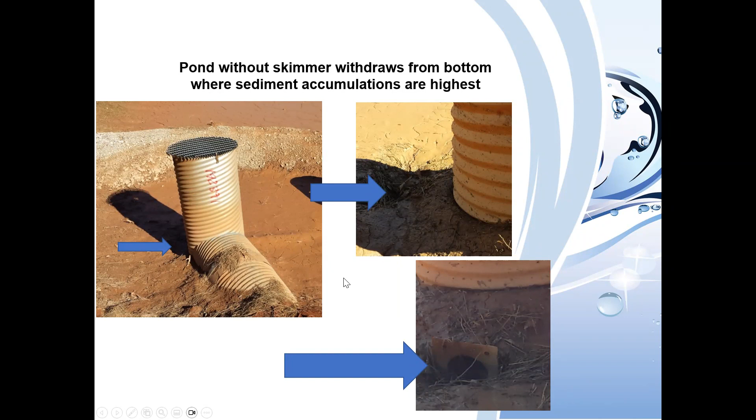So skimmers have been around for quite a while now. Some states have been enforcing them for maybe 15 to 20 years. Others are just now coming on board. But the main thing with the skimmers, it floats on or near the surface of the basin and drains the basin from the top down. So it meets the surface dewatering component of your construction general permit. And they've actually shown to be very effective. It makes sense. You release the cleaner water at the top of the water column, allow more time for the mud to settle, and then slowly drain the basin down to the bottom.

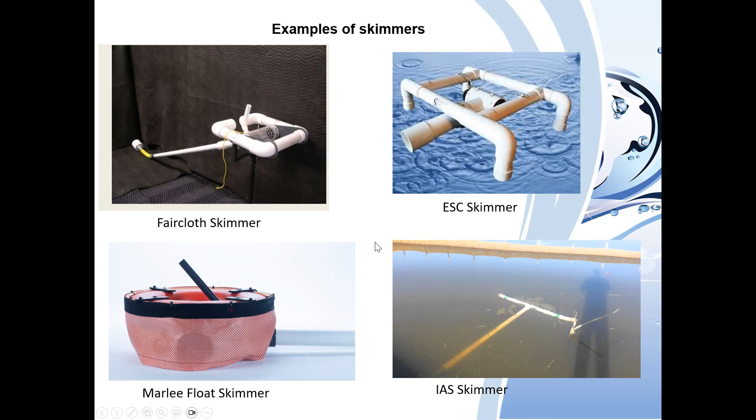So there are a number of skimmers on the market. The Faircloth skimmer was one of the first commercial versions. Erosion Supply or ESC skimmer is very similar to the Faircloth. You've got the Marlee Float, which obviously looks a little bit different than most of the others, and then the IAS skimmer. And there are some skimmers that can be made by the contractors.

So there are three basic fundamentals of sediment basin design. The first one is basin volume. What I've seen over time, and we sell skimmers in a number of different states, 1,800 to 3,600 cubic feet per acre seems to be the norm. Indiana requires 5,600 cubic feet per acre. So for 5 acres, that'd be a 28,000 cubic foot volume. Texas prefers that you calculate the volume based on a 2-year, 24-hour storm, or allows 3,600 cubic feet per acre.

And actually, if you get into the design, it's the lesser of the two. So if you do have a 2-year, 24-hour storm that produces less than 3,600 cubic feet per acre, you could use that. In Indiana, similar, it actually allows you to calculate the volume based on the 1-year, 24-hour storm. And so in a lot of cases, that volume is going to be less than that 5,600 cubic feet per acre. So if you're trying to save area on your site, which we all fight with trying to have room for these sediment basins and detention ponds, it may be worth calculating in those areas.

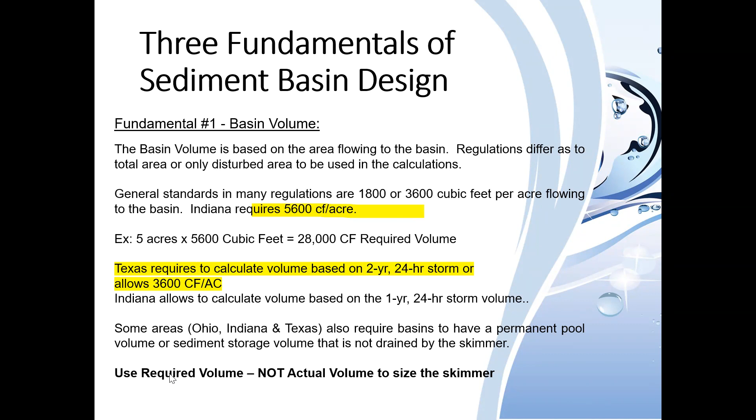But most other states just have a standard of 1,800 or 3,600 cubic feet. Some areas, Ohio, Indiana, and Texas among them, also require basins to have a permanent pool or sediment storage volume that is not drained by the skimmer, and you do not include this volume when you size the skimmer.

So the second fundamental is dewatering time. So basins are going to work by allowing time for sediment to settle to the bottom. Again, surface dewatering and giving more time to get the sediment to settle out. The time required is going to vary based on the soil type. Obviously, sands are going to settle really quick. So if you're in a very sandy area, that's fine to maybe let it drain a little faster. However, silts and clays take much longer, if they settle at all. It's different getting the mass out versus the color out.

So what we see across the country is 2 to 5 days is probably the most common standard we see. Indiana is 48 to 72 hours, and Texas is a minimum of 36 hours. And actually, I forgot to change this. I actually found where there is a max of 72, so it's 36 to 72 hours in Texas. And use your engineering judgment to determine the need for extended times for soil types versus the frequency of rain events. We're based in South Carolina, and so it's not uncommon to get that thunderstorm every afternoon in the summer. So you might want to drain the basin a little faster so it doesn't overtop.

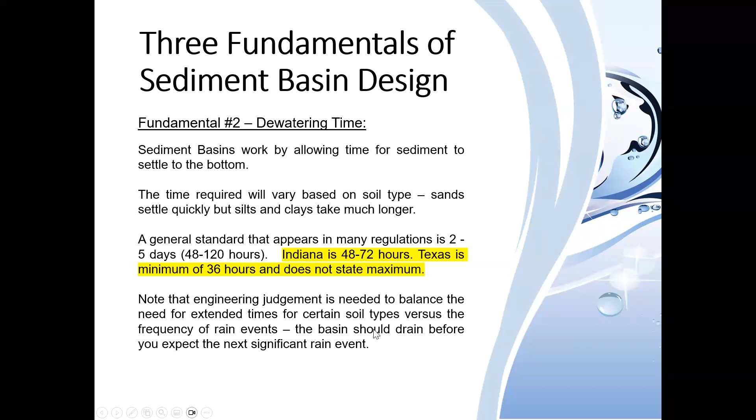So once you have the basin volume and you have the dewatering time, the third is going to be the flow rate. So the flow rate is going to be basically determined by the basin volume divided by the dewatering time. And you're going to use the minimum dewatering time for the maximum flow rate and vice versa. So for example, our 28,000 cubic feet for our 5-acre site in Indiana would be 14,000 cubic feet per day if you drain it in 2 days minimum time, or 0.16 CFS. Or if you did a 3-day, your flow rate would go down to 0.11. So one thing to point out, especially when you have that broader 2 to 5 day range, so 72-hour range, a lower flow rate will often result in a smaller and typically less expensive skimmer.

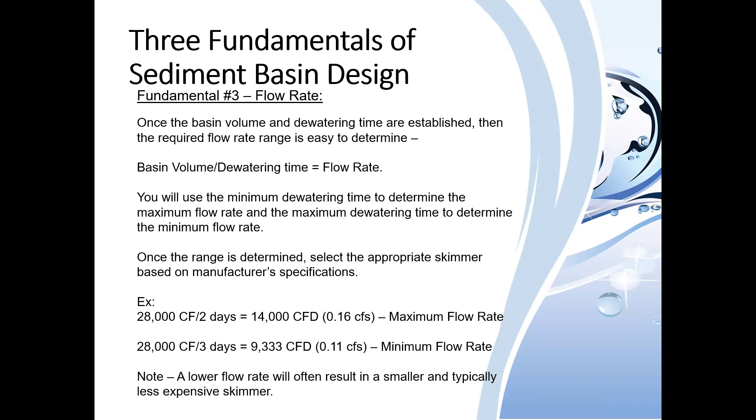So since we do have folks from Indiana and Texas, we're going to talk about the state standards there. So the standards in Indiana are fairly new. Actually, these are from IDEM, their state department, and they still have draft on them. So that's how new they are. So again, the dewatering zone for sediment basins is 5,600 cubic feet or the 1-year 24-hour storm. And you do have this sediment storage zone that is below the invert of your skimmer, and it's 1,000 cubic feet per disturbed acre. That's also in Texas for sediment basins, both of those.

And then the dewatering zone should drain no less than 48 and no longer than 72 hours. So a 24-hour range is actually pretty tight for these. We've seen a lot of places where you have a 72-hour range, but that's what IDEM has decided they want to go with right now.

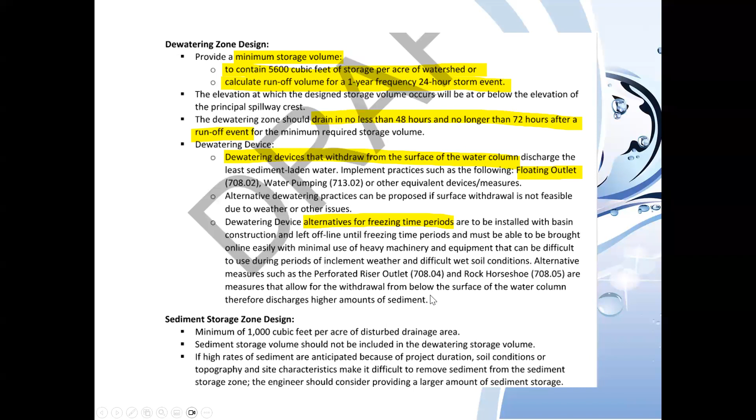They do require that you dewater from the surface, so you can use floating outlets, pumps, or other things. And one thing to point out is you do need to make alternatives for freezing time periods. If your construction site is going to be under construction in that probably November to February range, folks in Indiana know this better than myself, you need to probably have a way to drain that basin if the skimmer does freeze in the pond. And then finally, like we said, the minimum 1,000 cubic feet, and again, they point out should not be included in the dewatering storage volume.

Apologize, I'm getting over some allergies, so may cough a time or two, but try to keep that to a minimum.

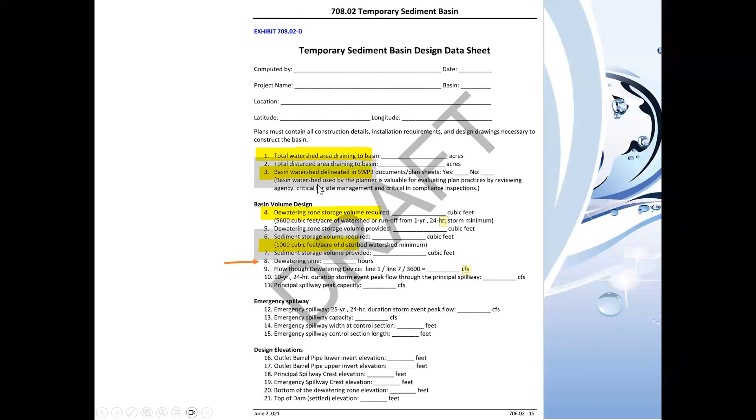So your temporary sediment basin design sheet, you're going to have this area here. You got your total area, total disturbed area. Those correlate with your dewatering zone and your sediment storage volumes. One thing here on dewatering time, we recommend establishing a range of time for dewatering. The reason for that is you're often going to get a contractor that says they have a different skimmer that they want to use, and can we use it? Well, maybe, maybe not. Depends on if it still meets the flow rate required. So if you establish that range, it gives them more likelihood that they can do that.

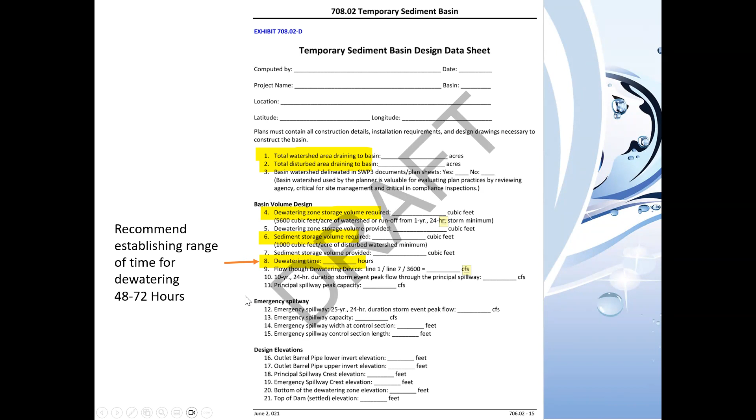I'm not going to go through this entire basin data sheet. I'm sure most of you are familiar with that. I just want to kind of focus on the things that are skimmer related for this webinar today.

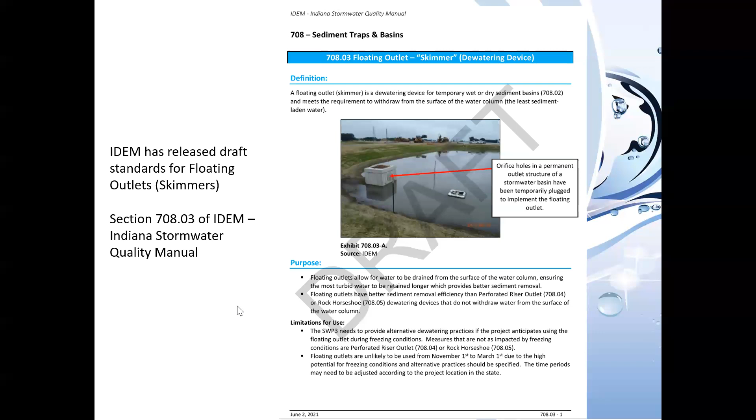We're going to jump over real quick to Texas sediment basin standards. So they're similar. Again, the storage provides storage for the 2-year 24-hour storm or the 3,600 cubic feet per acre. One thing to note is the Texas TCEQ construction general permit just went into effect last year, this time, March 5th of '23, and it has very specific requirements for sediment basins. We're just now really starting to see more skimmers in Texas, but these regulations have been in the construction general permit since 2013. I believe March of 2013 is when they first went into effect. And so it's taken 10 years or so to kind of get around to enforcing these things.

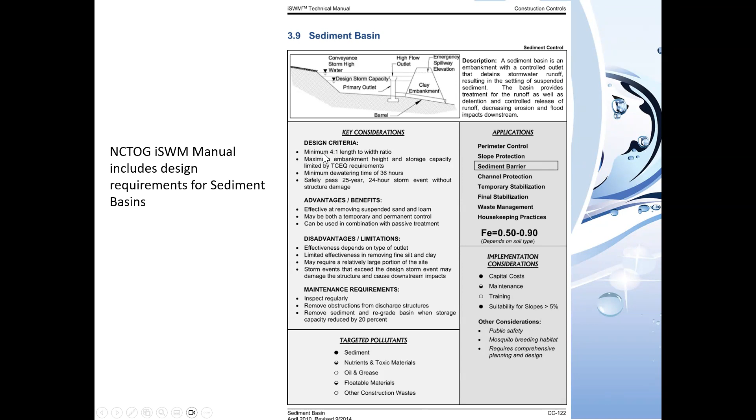And then they do have in the CGP that unless infeasible, you need to use outlet structures that withdraw water from the surface. So a lot of the details in certain cities and counties in Texas still show the riser structure in their standard detail, but they're starting to catch up with updating their standards to include skimmers. So north central Texas is where the stormwater manual comes from. This includes design requirements for sediment basins. Again, has kind of the same things in here we've gone over. One thing they do point out with skimmers is that for the flow rate needed to discharge the basin, you need to select a skimmer based on the flow rate, not the skimmer size. And we're going to talk about that in just a second.

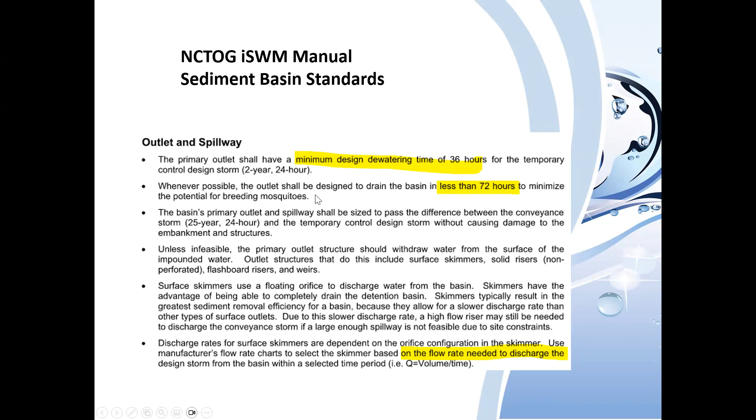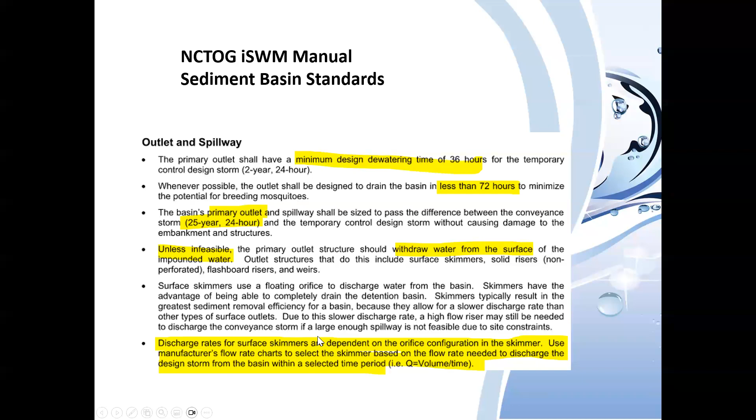Again, you've got a minimum dewatering time of 36 hours. And here we have, at least whenever possible, less than 72. They don't say a shall there. So if you end up going slightly over 72, looks like that's okay. Your primary outlet is going to be the 25-year 24-hour storm. And then again, withdraw water from the surface unless infeasible, and base the discharge rates on the skimmers itself. Most skimmers have third-party testing to confirm their flow rates, and we recommend you use that rather than the orifice equations.

Again, there is a design form for North Central Texas, has the general same information. Oops, sorry, jumped through that. And it does say the lesser of 3,600 cubic feet or 2-year 24-hour storm. So the text is a little bit different than that, but since they've got this design form in there, I'd say you're safe to go with that in most cases.

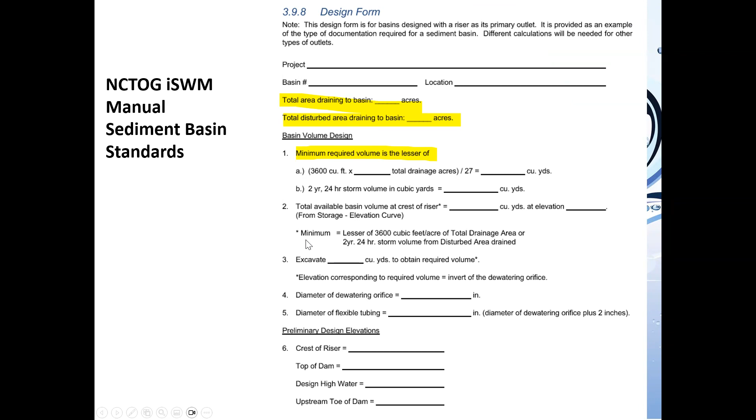Then I just quickly want to run through some state sediment basin standards, just to kind of give you a feel for how it does differ across the country. South Carolina, where we're based, again, the volume is 3,600 cubic feet for the total area. Texas is the 2-year 24-hour storm or 3,600 cubic feet, plus the 1,000 cubic feet for sediment storage.

Indiana is the largest volume required of 5,600 cubic feet plus that 1,000, and then Ohio is 1,800 cubic feet plus the 1,000. So you can see pretty big differences when you go to your pond requirements for the different states. Some states have requirements for surface area. Texas has a minimum length to width ratio they want to see. Indiana and Ohio just have a preferred or maximum depth.

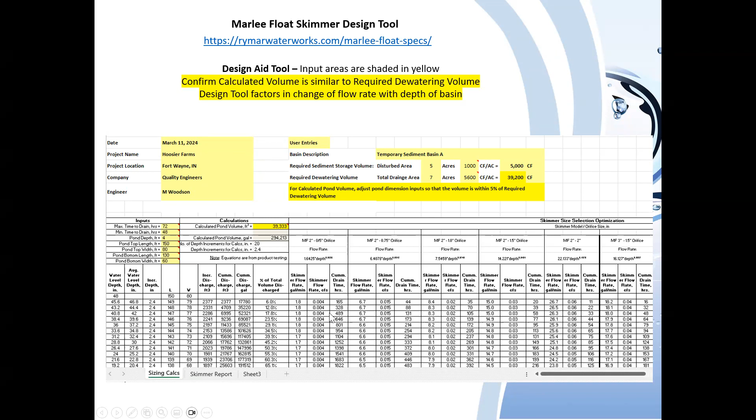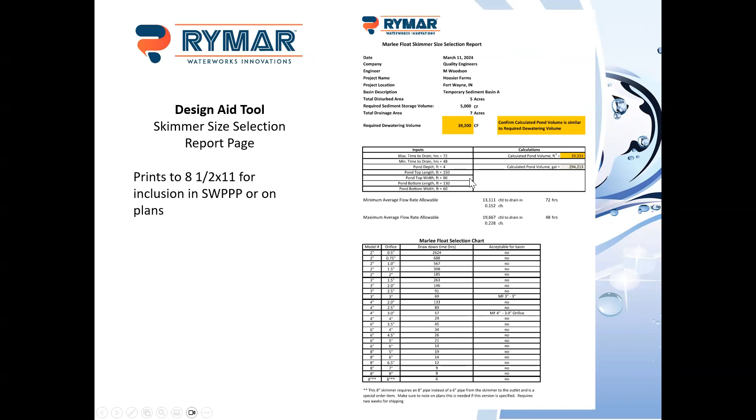It's going to calculate a pond volume for you. Don't spend all day trying to get this to exactly that same number. We typically recommend trying to get within about 5% of your required volume, because again, you're working on a range of time here. When you do that, our handy dandy tool is going to calculate the flow for each skimmer with each orifice configuration. And then down here at the bottom of the page, it's got a skimmer report page tab. Click on that, and it's going to take you to a nice, neat 8.5 by 11 for inclusion in your SWPPP or on your plans.

The top section is going to have that required pond volume check. So really quickly, your reviewers can see that, hey, we've met this. I know we had a lot of people from Ohio. Depending on your location in Ohio, this is a pet peeve of some reviewers there, if they size the skimmer on the total pond volume. Now, that total pond volume may be 100,000 cubic feet. Well, if that's the case, you drain that 39,000 way too fast. So that's why you want to base that. We tell you what your minimum flow rate is and your maximum flow rate is based on that pond volume.

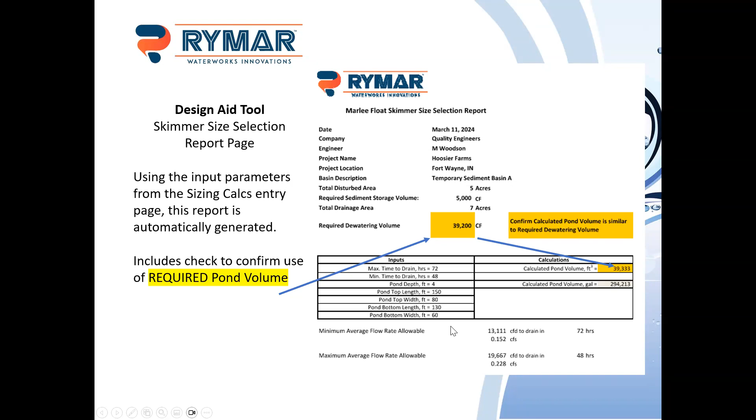And then because it is our tool, it'll give you the drawdown time for each of our skimmers with each orifice configuration and tell you which one here met your time frame that you established. So if you've got say a 2 to 5 day range, you may have 5 or 6 skimmers available here. And then as engineer, you can pick which one you want. Do you want to go with, in this case, the 4 inch that drains the pond a little faster, closer to that 48 hours? Or do you want to go with the 3 inch with a 3 inch orifice? That's getting close to that maximum time, but it's going to be a little less expensive for the contractor. Up to you as engineer, which one you prefer.

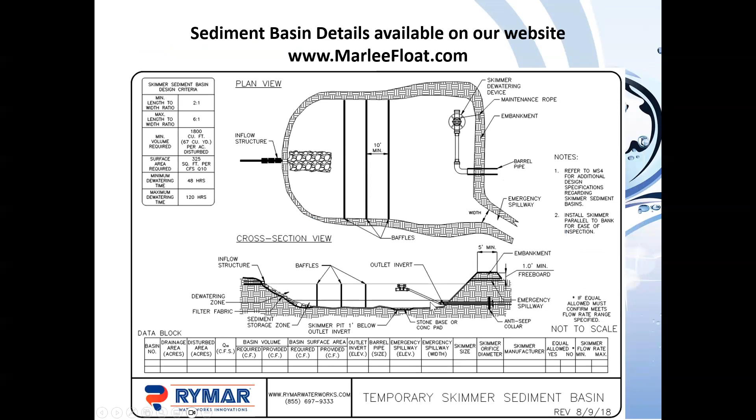We have some standard details on our website available as well. We have 4. This one is our standard temporary basin that doesn't have a riser structure, and it's a dry basin. This one is our more typical, going to be a post-construction basin, or at least it has a riser and the skimmer. It also has a permanent pool. So if you look at this, there's a chart here that'll tell you the minimum length to width ratio. Now you can edit this as needed. Like here, I've got 2 to 1, and in Texas, that's 4 to 1. Maximum length to width ratio, here I've got 6 to 1. Actually, in Texas, they prefer it up to 10 to 1. So you can change this as needed for your location.

Very important here, put in your minimum and maximum dewatering time. If you plug that in now and you get that approved during your review, it makes it much easier if you need to swap out skimmers or make a change. Again, you just want to make sure you meet your sediment storage so your provided is equal to or more than your required. Your dewatering volume, typically your provided is going to be greater than your required. And then standard features: your drainage area, disturbed area, your flow rate for whichever storm events are required for your area, surface area, bottom of basin, your outlet inverts, that's your main pipe out, the barrel pipe size, that's your pipe going through your dam, top of riser, emergency spillway, and here we get to the skimmer information.

So you've got your skimmer size, skimmer orifice diameter. It is our tool, so I'm going to plug Marlee in here for you, or Rymar. Change that if needed. Is an equal allowed, yes or no? Most of the time that's going to be yes. There are going to be some times when it's no. If you have some specific requirements that you have to meet a very tight flow rate range, you may say, nope, you have to use the one I spec'd. And then here again, specify your minimum and maximum flow rate based on your minimum and maximum time. If you do this, it typically makes it easier when you do have contractors make requests to confirm if the skimmer they want to use complies with the design requirements that you had to meet.

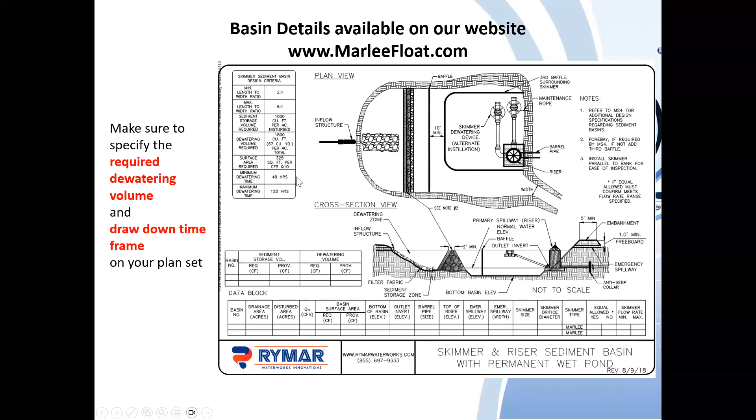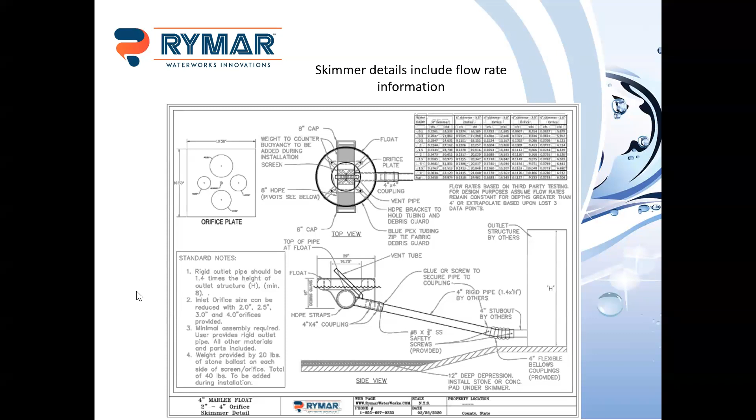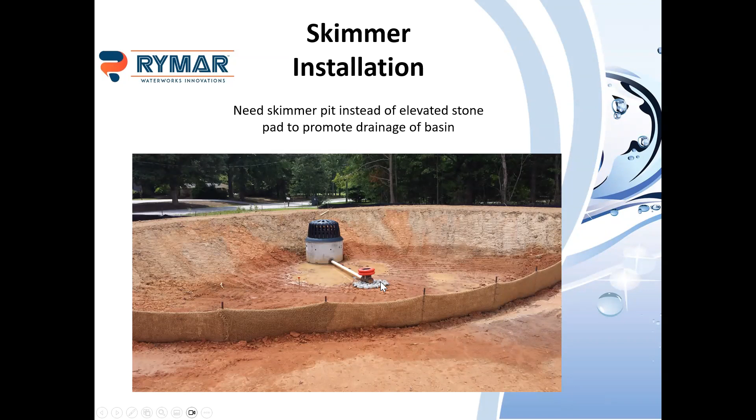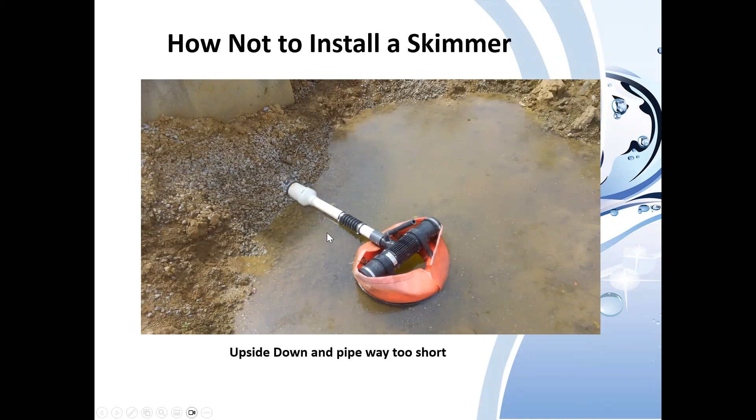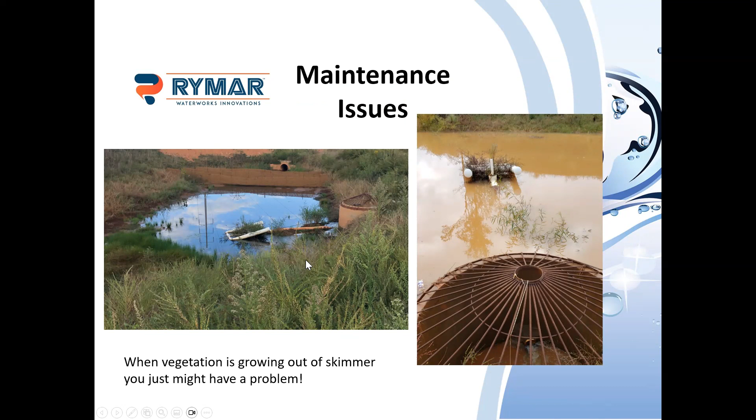So that's most of our during construction talk.

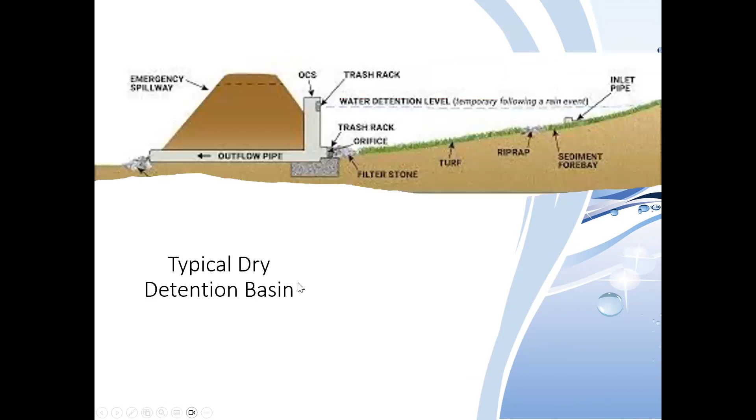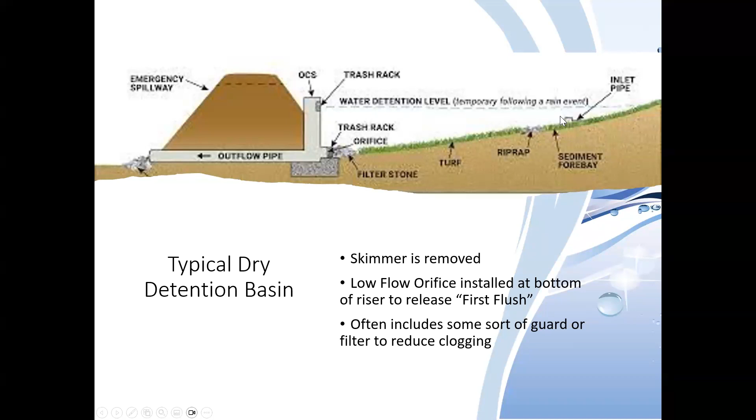So this is our typical dry basin, right? The skimmer's been taken off. You got a low flow orifice of some sort installed to release that first flush volume for water quality. And you got some sort of guard down here to try to keep that thing from getting clogged best you can. Filter stone, perforated pipe, trash rack, whatever it may be. But this may be an exaggerated model. All the sediment is coming downhill down to this location.

So without a skimmer, basins are going to rely upon the natural settling of sediment particles as they travel from the inlet to the outlet structure. So you got our sediment coming in, and the idea is we have enough time for that sediment to get to the bottom and not get out. However, with that outlet at the bottom, that's harder to do. Skimmer is going to release that cleaner water from the surface.

It's now widely accepted to do that in construction, right? So we've been doing this in some areas for 15 or 20 years, and we can all complain about the EPA, but skimmers, the surface dewatering, are actually a very cost-effective, high-benefit requirement. So why would we take the skimmer off post-construction and start sucking the mud off the bottom again? So it just seems to make sense to consider releasing that cleaner water from the surface for post-construction.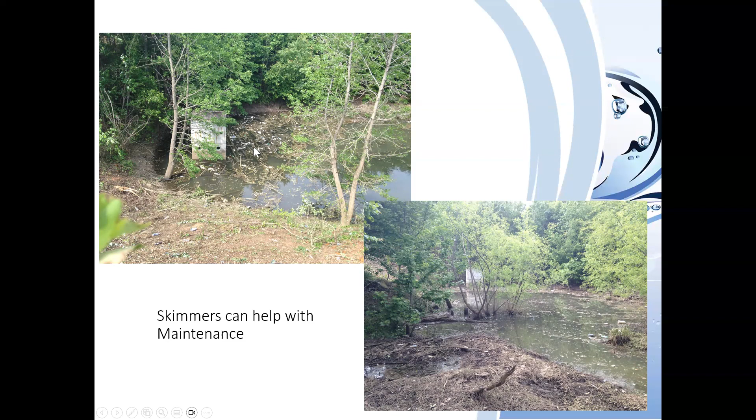So this is a little quick case study. So we had a site in South Carolina that was a mess. It had been severely overgrown. Contractor went in and cleaned it up, and this is after the first cleanup. You can see it's just holding water. See some orifices here. We did some investigation, and we found out that there is a 2-inch orifice 6 feet below the now bottom of the pond. So 6 feet of muck had accumulated in this pond and needed to be cleaned out.

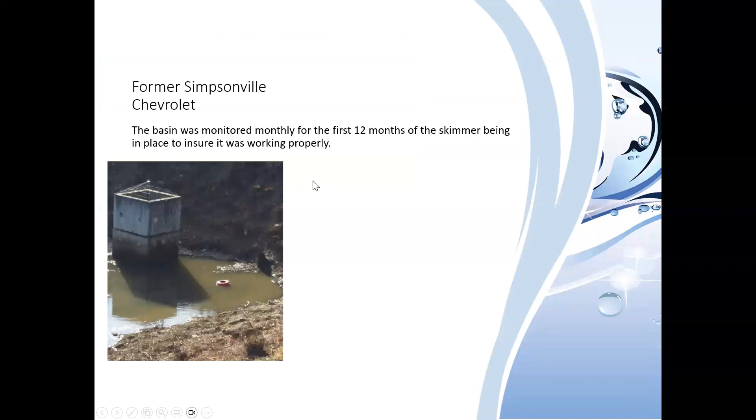So we got permission from the county to modify the pond and put in a skimmer as a pilot project. To do that, we had to monitor the skimmer for the first 12 months. And so this picture here is a good example. We now have a skimmer in, okay? The skimmer had a 4-inch orifice, double the size of that 2-inch, so it's less prone to clog, but it's also much easier to get to. And the skimmer worked really well for about the first year.

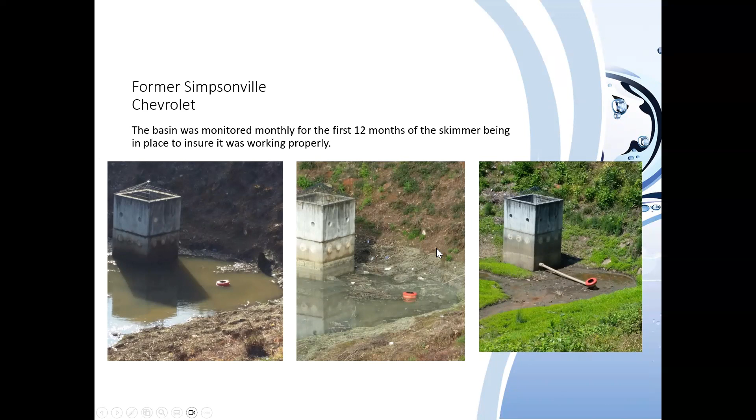Just after the first year, the owner decided they were going to do some maintenance, and they went out and cut all the vegetation on the side of the pond. And before they could get it out, it rained and it washed all the clippings down in the bottom of the pond. And this was the result. So we had a 5-inch rain, just flushed everything down. But you can see our skimmer here, kind of buried in the muck and debris, did actually drain the pond.

You can imagine if there was a 2-inch orifice down here with all that junk, very likely to have been clogged. It's kind of hard to tell. This is a 12-foot riser. There's 6-foot sections. And remember, there's a 6-foot section below because all this junk has accumulated in this basin. So if you had a 2-inch orifice here, it'd have been a really hazardous situation to try to get to. Honestly, would have required scuba gear to try to get it unclogged.

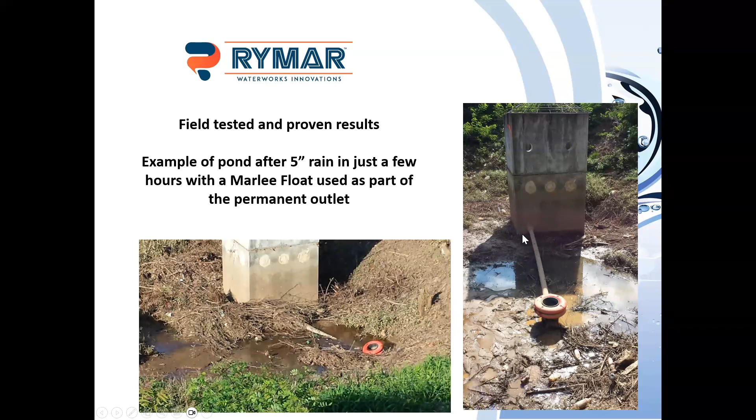So just a good example of how a skimmer can help with maintenance. Typically you'd have a rope tied to the skimmer. So if it did clog, you just pull it over to the side, shake it off, it'll start draining again. So much easier to clean out than a low flow orifice at the bottom of the pond that's totally clogged.

So if we're going to consider using a skimmer post-construction, how do we model that, right? We've got to now put that into our detention basin design model and show our regulatory folks that, yes, we still meet our requirements. So we're going to talk about advanced skimmer modeling for Hydraflow. Now that Hydraflow is part of Autodesk, that seems to be the most popular hydrology software, but this will generally apply to most hydrology softwares. At least you'll kind of get the intent.

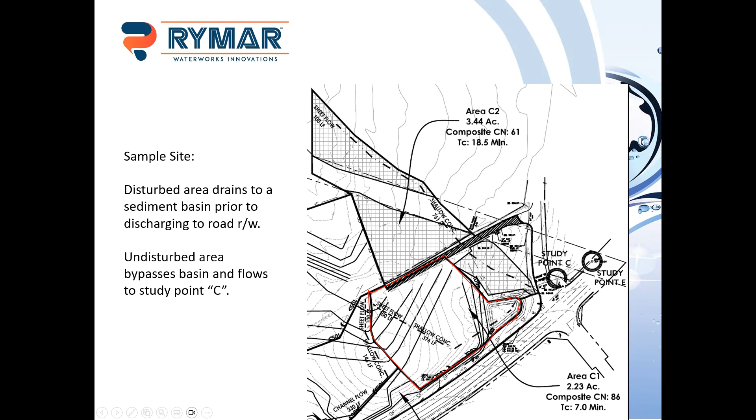So this is a site we did. It was actually in the city of Greenville, South Carolina. Greenville is unique in that they require quantity control during construction. So this was our model. We had our existing site and our proposed. The site was about 5.5 acres. It was about 3.4 acres up here that wasn't being disturbed, but it was coming down to our study point. And then we had 2.25 acres that we're disturbing. We're putting in a little sediment basin, and this is flowing down to a road. Actually, it was going to flow across the road, so we wanted to maintain our peak just so we didn't create liability.

So again, pre-development, 5.5 acres. Curve number 59. That was a wooded site, Class B soils. Time of concentration was 18.5 minutes. In post-development, the portion disturbed was 2.25 acres. Curve number is 86 for bare earth clay in our area. Time of concentration down to 7 minutes.

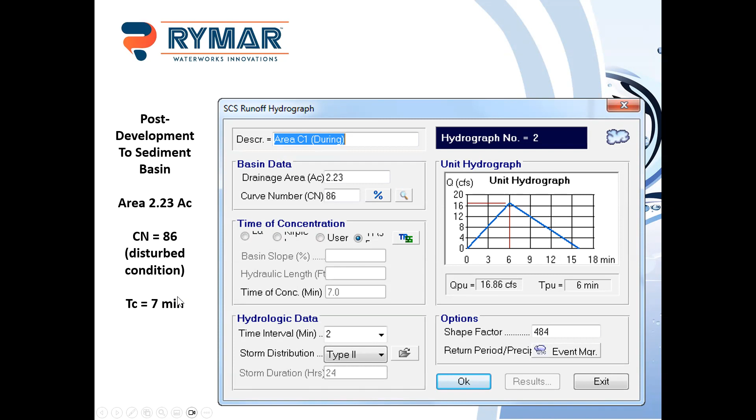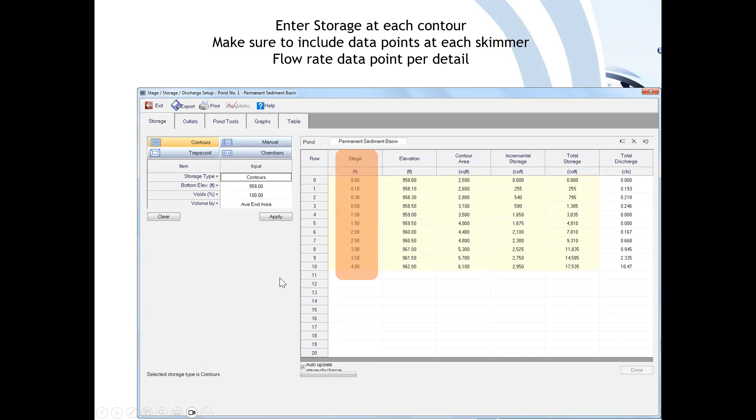So when you build your pond, you need a place to enter your skimmer flow data. So when you do your stage, you want to build in the stage for later being able to enter your flow. So here we have 0, 0.1, 0.3, and then a 1/2 foot up to 4 feet. That's going to correlate with the testing data for flow rate on our skimmers. So you're just going to be able to plug that in later.

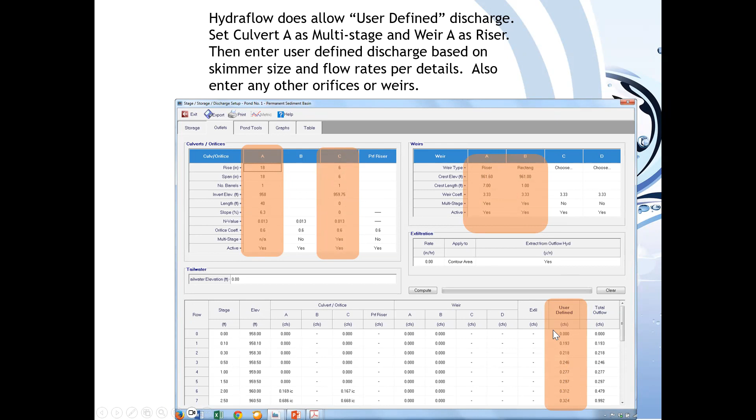So then when you get to build your outlet structure, you've got your barrel. That's your 18-inch pipe going out. Complicated little structure for a small pond. So you've got a 6-inch orifice that's 1.75 feet above the bottom, got a riser structure that's 3.6 feet tall and has a 1-foot rectangular weir 3 feet above the bottom. And then the secret sauce to this is this user-defined column. So here is where you're going to enter the flow rate for the skimmer. Again, you built your stages, so you can plug that in and build in that flow rate curve to Hydraflow.

Now, Hydraflow will interpolate between the stages. You don't have to, every half a foot or even a foot is okay. If your basin's over 4 feet deep, we have a couple of recommendations. So one, you can just use the flow rate at 4 foot of depth. It's not going up that much more there. If it's 5 feet or maybe 6 feet, that's probably fine. If you want to extrapolate it based on these last 3 data points, that's fine.

If you want to get really detailed, you can go back to our design tool we talked about. You can put in your pond depth to what it actually is, not just what you're doing for your skimmer. It's going to break the water level into 20 increments, and then it's going to give you the flow rate, and you just use the spreadsheet and go across to whatever skimmer and orifice configuration you're using, but it'll give you the flow rate at each incremental depth. And then you would use these increments in your Hydraflow stage storage or something pretty close to them. What you're going to find is they don't change a lot; again, the bigger skimmers have about a 25% increase in flow from 0 to 4 feet.

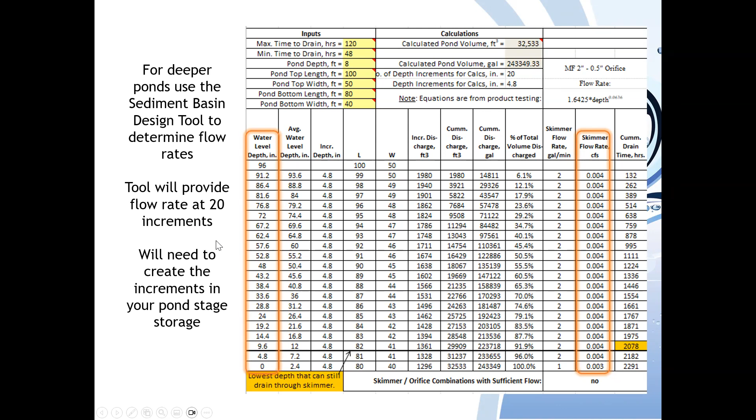Smaller skimmers, you see less of that. But this will give you that exact, you can go out to 4 or 5 decimal places if you need to for your flow rate. So that's how we recommend if you really have a deeper pond to get more accurate flow data.

So then you're going to see your schematic of your outlet structure look like this. So again, normally you'd have a low flow orifice down here, right? You'd have a 2 or 3 inch hole that you're using for your low flow. You're not going to have that. You're going to have your user defined take that place, your 6-inch orifice, your rectangular weir, top of your riser.

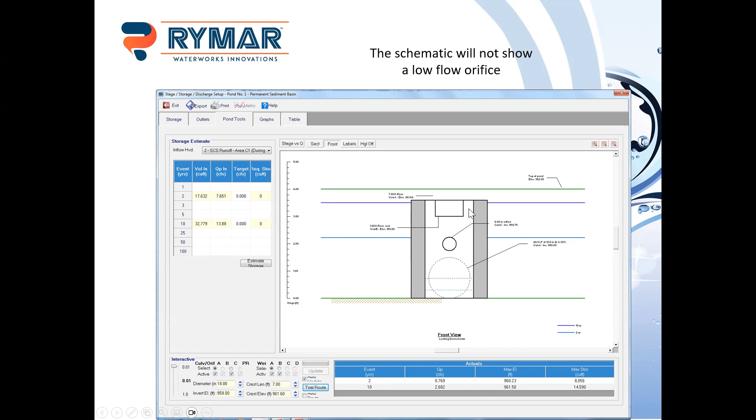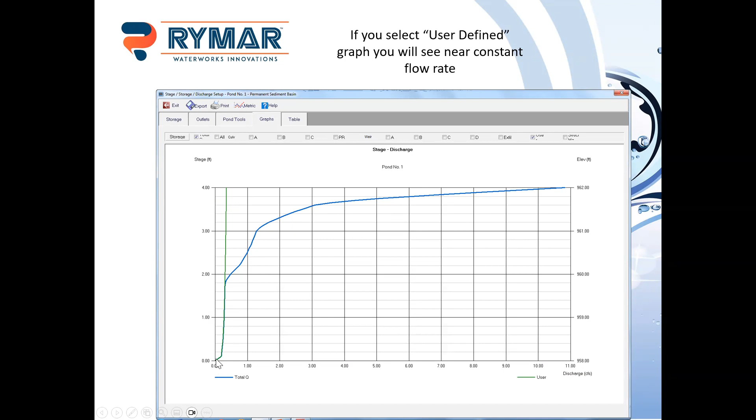But if you look at your stage discharge curve, here's your skimmer flow. So that's your user defined kicking in here. I know that green line's a little hard to see, but we've got the green line here. That's your skimmer flow, which is a very small percentage of that total flow. Total flow is getting up 3 to 5 CFS. That skimmer is like at 0.1, 0.2 CFS.

And then your table here is going to show that your user defined and your total flow are basically the same until the other orifices kick in. So we said here at 1.75 feet, our 6-inch orifice. So now our total outflow is more than that 0.32. It includes that 6-inch orifice as well, and so on.

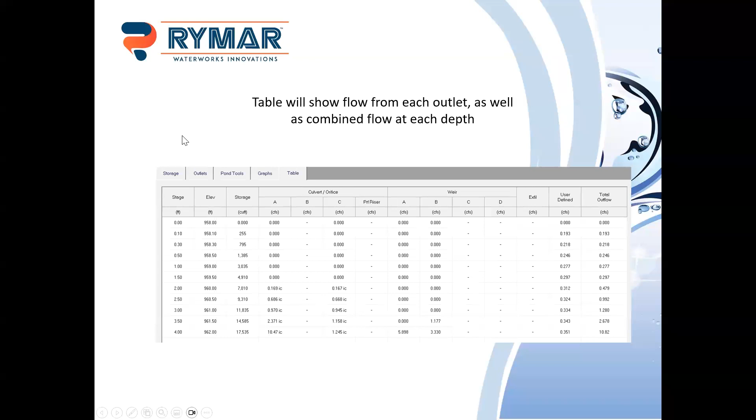Hopefully that makes sense. There is a more detailed tutorial video on our website or our YouTube channel, both for sediment basin design and for Hydraflow.

And then real quick too, we're going to touch on HydroCAD. HydroCAD is a software that's really similar to Hydraflow. The one difference in HydroCAD is that it's a much smaller company and it has incorporated a lot of proprietary products. And so here with HydroCAD, the main difference is when you build your outlet structure, you don't have to build in the stage storage for each data point anymore. They have these things called special and user defined outlets.

And if you click on that, it takes you to a folder that has multiple folders of a variety of proprietary products. One is the Marlee Float skimmer. So you just go into there and you pick which Marlee Float you want to try, and it plugs in the flow rate for you up to 4 feet. It has this neat little extrapolate button. So instead of having to go back to our tool and put it in, you can tell it to extrapolate. It'll use the last 3 data points and extrapolate the flow out.

If you had a huge pond, you needed 2 or 3 skimmers, you can do a discharge multiplier for that. And so it just makes it a little bit quicker, kind of avoids the potential typos that you have with Hydraflow.

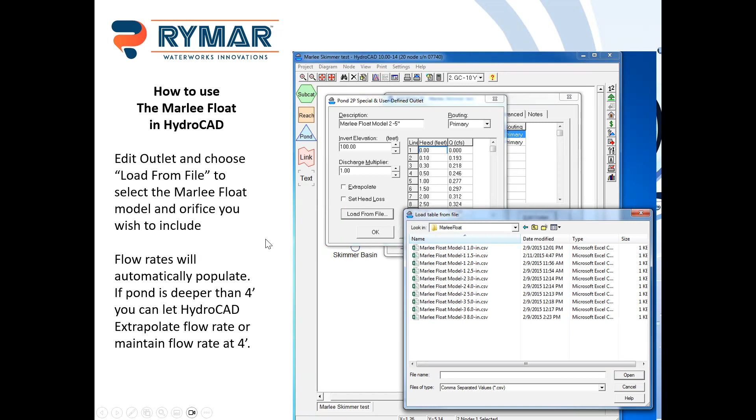All right, so last thing here we're going to talk about, we're really excited about this too, and hopefully this makes a lot of sense not only to our engineering participants today, but also for those in the MS4s. I'd love to get some feedback from you, and you'll see why here in just a few minutes. So we're going to talk about advanced skimmer modeling for filtration-based water quality.

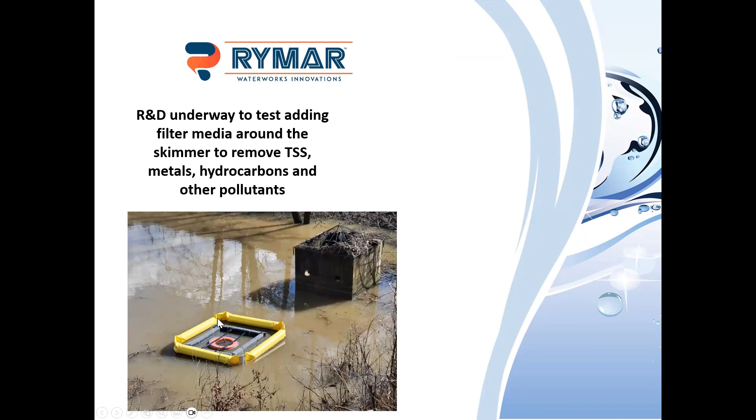All right, so what are we talking about here? So we've been doing research now for a couple of years to put a filter around our skimmer. And so this goes back to that same pond that we have been using kind of as our guinea pig, that one that we first put a skimmer in and did the pilot program. And we came up with this filtration system that's a two-stage system.

The outer stage, and it's kind of hard to see here, this is basically a turbidity curtain, but it's a flow-through curtain. So it's got basically a screen like a Mirafi 402 polypropylene filter fabric on the outside here, the woven material. And then here on the inside, we have this non-woven fabric. So this is a material called Adsorbate. The version we use actually has an antimicrobial treatment on it, so it has some benefit for bacteria.

It does a great job of absorbing hydrocarbons and has proven to be very effective with TSS. They do have some benefit with metals, and you're going to get out a lot of the particulate phosphorus and nitrogen. We don't know if it's going to do anything for the dissolved phosphorus or nitrogen, but at least you're going to get that particulate portion out.

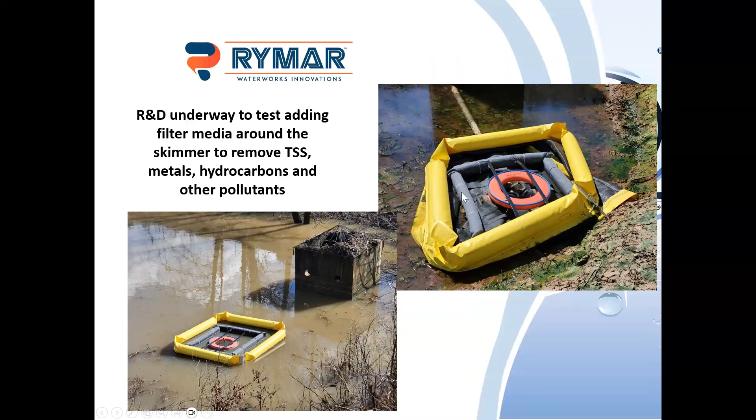And so we've been field testing this now for about 2 years. It's gone really well. So you can see, it's kind of hard to see in this picture, but the turbidity of the water in the basin is higher than what's here through the skimmer. You can definitely see there's a slight color change here and there.

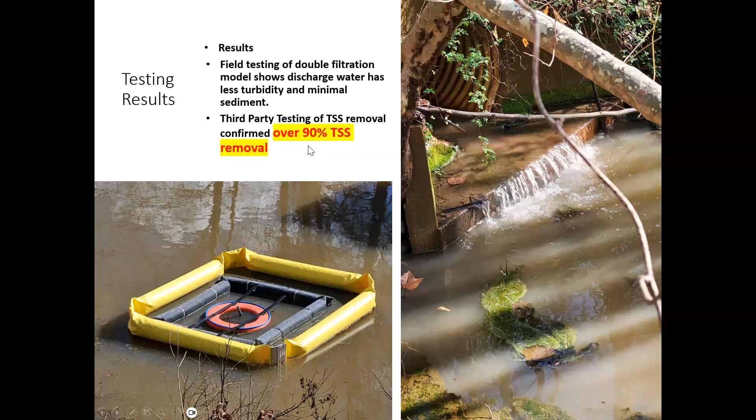But if you look at the outlets, this is actually the outlet of the pond flowing, and that water is actually pretty clear. I don't know that I would drink it, but it's definitely a lot cleaner than what was coming in. And so we have had this tested. We did a third-party test. We used TRI Environmental, the same company that did the testing for Georgia, and they confirmed over 90% TSS removal for the skimmer filter combination.

There is an ASTM standard out there. It's C1746. ASTM has just recently gotten into establishing standards for stormwater quality, but this is the new one for sediment retention devices. And we had to test two versions. We tested our 2-inch skimmer, I think, with a 1.5-inch orifice and a 4-inch skimmer. And one thing I want to point out is we tested this to take out the benefit of the pond.

So your typical pond is going to have a forebay. There's going to be a significant distance from the inlet to the outlet, so you're going to get some settling. You're going to have some benefits of just the travel time, right? Well, in this case, oops, hit the wrong button. This is our inflow with our sediment-laden water. So it's really like 1.5 feet, 2 feet here between the inflow and our filter. And so we're using the skimmer to pull this flow through the two stages of our filter.

The filter is 30 inches deep or 36 inches deep, so it's 3 feet, and it's open on the bottom. And so if the sediment does settle down to 3 feet and you get some flow coming from below, the flow rate is not enough to pull that sediment up 3 feet so it gets discharged. So we're letting gravity do its work. Advantage of that is you're always going to have an open bottom, so you'll never completely blind off or clog up. But you do get the benefit of most of the flow coming through the filter.

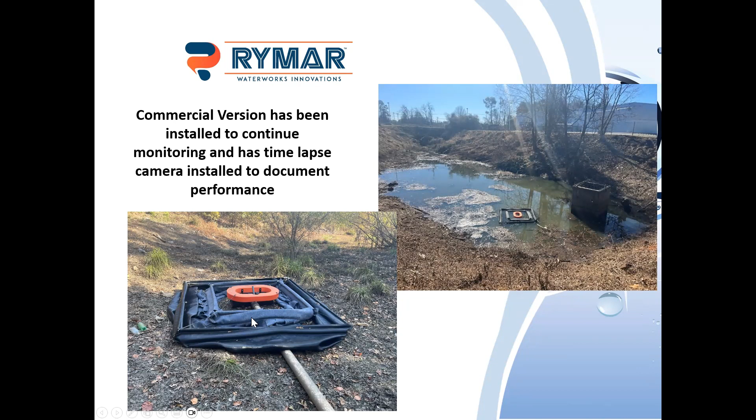And then this is our current skimmer with the commercial version of the filter here. So it's, again, that woven fabric on the outside, non-woven on the inside. And I've got to mention, we do have a time-lapse camera set up, so we monitor this every storm event. We're taking pictures and keeping going. So let's talk about what are the benefits. Let's just look at filtration versus settlement.

And so if you have filtration, rather than having to slowly discharge that first flush over 24 hours or more, you can base that flow rate on whatever your filter can handle. That filter is going to treat 100% of runoff from the storms up to the peak rate of the filter. So what happens if it rains 1/4 inch in 6 hours where you are? How much ponding are you seeing in those detention ponds? How much settlement are you actually getting?

Reality is that first flush, if it hadn't rained in a couple of weeks and that's a relatively small rain, could be a hard, quick rain, but small, it's going to flow in and flow out, right? I mean, we're not really treating that water, although that is our water quality method.

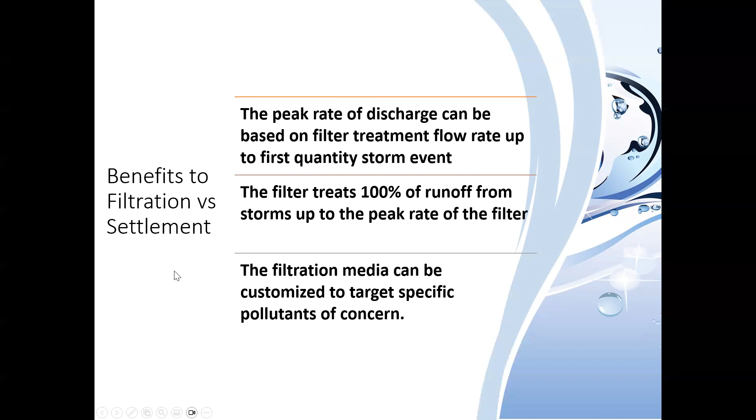And the other thing is your filtration media can be customized to target specific pollutants of concern. Hey, it's at a gas station or a truck stop and you need hydrocarbons. We've got an industrial site that does metals. Okay, we've got to do something with that. So you have the option to add specific media for specific concerns. So again, the benefit to filtration is that peak rate.

Actually, sorry, duplicate slide. So then let's talk about what's the benefits to using the skimmer with filtration. So first off, we got a benefit just for filtration versus standard settling. Now, if we look at the skimmers with it, your skimmer is going to be used to control the peak rate for that lower storm event. So if you can size the skimmer to handle that 2-year storm event, and that's your first quantity control event, obviously depending on your location, use the skimmer to do that.

The skimmer is going to increase the filter efficiency by withdrawing from the surface where the water's cleaner. So now our filter is not going to get as dirty because you're going to be trying to pull cleaner water through it, letting the other stuff settle out. And then the skimmer is pretty easy to access, right? You can just pull it to the side, you can get to it, you maintain it, you're not getting in a vault, no confined space entry, that kind of stuff.

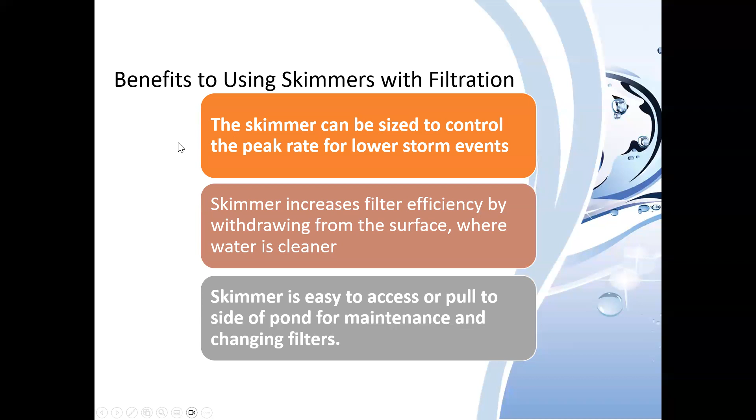And so the other thing here, when you use your skimmer to control your peak rate, let's say you do size your skimmer for a 2-year storm, you're now treating all the rainfall up to that 2-year storm event to that higher treatment rate, in our case, over 90% TSS. So whether it's a tiny storm, it goes through the filter. Up to a 2-year storm, goes through the filter. So you're getting much better treatment.

But skimmers with filtration are definitely not the perfect, fit-all answer. They're going to be prone to clog over time. You're going to have to do some maintenance. We all understand maintenance is a challenge, and so having to rely on that does pose an issue. Your skimmer's got to be durable. We would not recommend use of PVC products for this. Our skimmer happens to be HDPE. It was designed when I invented it to be a permanent use product, just because I thought there was advantage to that.

And here is probably the biggest challenge: there are no established standards for basis of design or permitting when you combine a pond and a filter. Most ponds say first flush, slow release, extended detention. Those standards are in there, right? We have very few people, or none that I know of, that have standards to combine a filter and a pond.

In most cases, this is going to be treated as an MTD, manufactured treatment device or proprietary device. Some places have very strict requirements on those. Some have very little requirements on those. It's going to be based on your area.

Interesting question. I got a question: do people steal skimmers? Haven't really seen many stolen, but I have seen some vandalized. Evidently, they make good targets sometimes for people with BB guns or 22s.

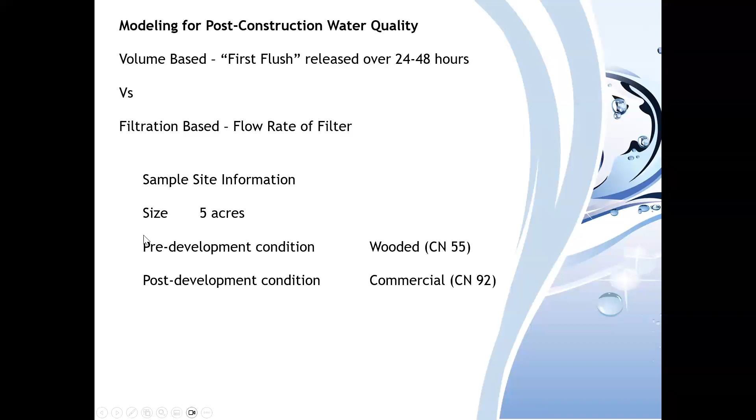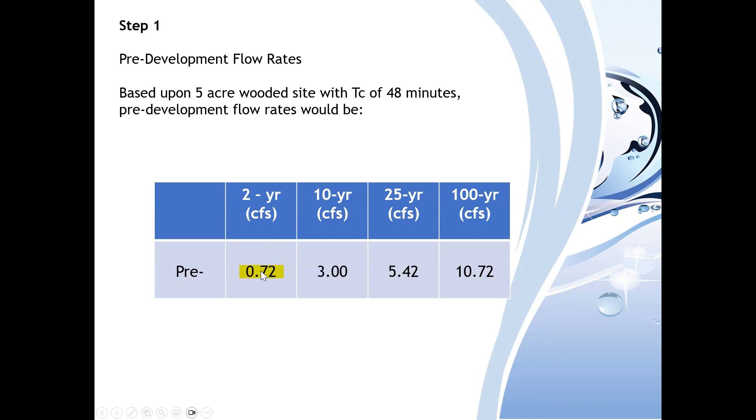So first thing we're going to do is calculate our pre-development flow rates, right? Hypothetical 5-acre site, time of concentration estimated at 48 minutes. Use HydroCAD. We're going to focus on our 2-year storm. The 2-year storm event comes to 0.72 CFS, then goes up to 3 for the 10, 5.4 for the 25, 10.7 for the 100. But again, we're going to focus on the 2-year storm and below for this illustration.

So next, we're going to look at our water quality volume and our post-development flow rates. So it's a 5-acre, fully developed commercial site. Time of concentration is now down to 10 minutes. And we're going to calculate the water quality storm event and the post-development flow rates.

So the water quality storm event, in our area, it's 1 inch of runoff, and that's what we're basing it on. My understanding is in Texas it would be 1.5 inches, and that's determined by the 85th percentile storm, which is also what Indiana uses. I did not find a rainfall runoff amount for Indiana, so if somebody has that, it'd be great to let me know what it is. We got several conferences in Indiana coming up. We want to be accurate.

But for this example, let's back up. 1 inch of runoff is 18,150 cubic feet.

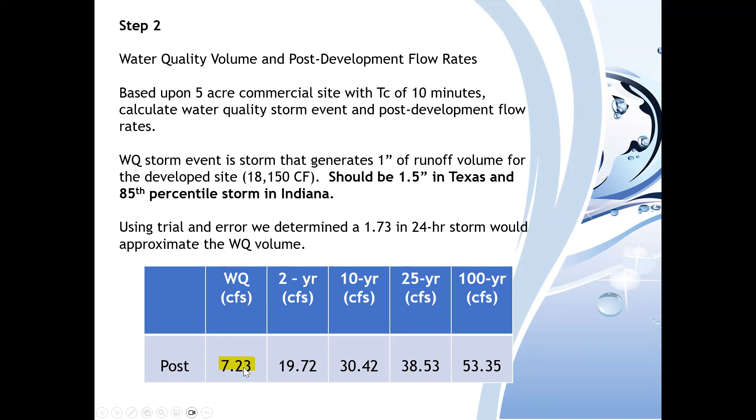During trial and error, I came up with a 1.73 inch rain event in a 24-hour storm, and that would give us our water quality volume. Based on that storm event, we got a 7.23 CFS water quality storm. The 2-year went from 0.72 to 19.72, and then on for the 10 and 25 and 100.

So traditionally, this is what we used to use when I did this. I'm sure most of you engineers have some similar tool out there. So it is a first flush orifice calculation. Okay, so in this case, we're going to use a dry pond. Got 5 acres. Again, here we have 1 inch for a dry pond. I'm going to hold it for 24 hours.

And so what we do is we assume that that entire volume magically, instantaneously, poof, appears in the pond, right? And we know that doesn't happen, but that's what we base it on. And then we're going to drain that volume in 24 hours. That gives us a 2.6 inch orifice, or a 0.21 CFS flow rate.

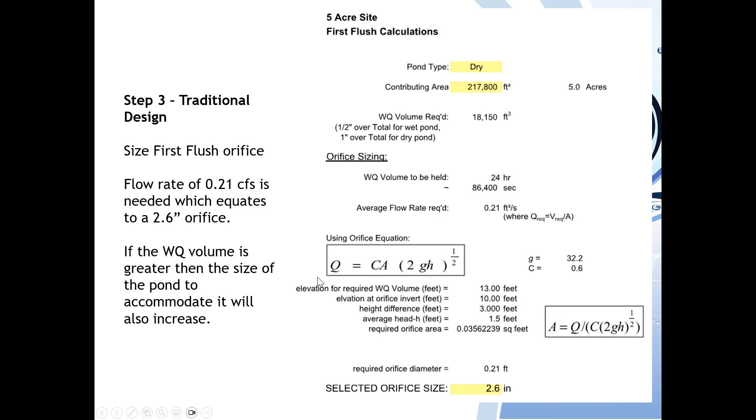So let's do a pond design. So we came up with a hypothetical pond design, got that water quality volume in here. Okay, our bottom of our pond's at 10. We're going up to 13 to reach that 18,150 cubic feet. We get to put in an orifice above that.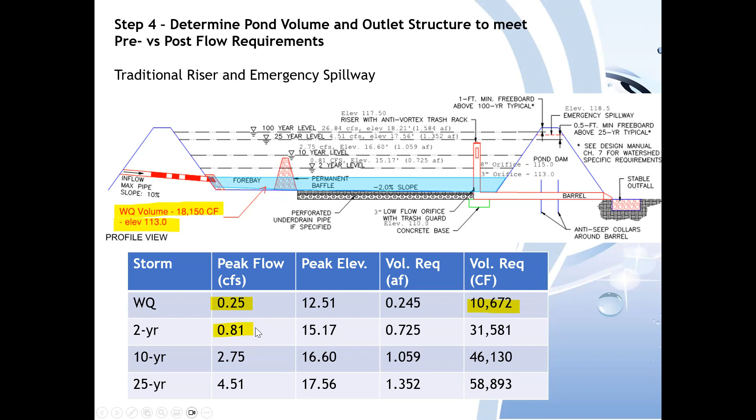Remember, we're required to have 18,000 before we can have another orifice. So we're really only using 8,000 or 7,500 cubic feet less volume than what we're required to have. 2-year storm, we ran it at a 0.81. Again, it was 0.72. So maybe we allow less than a tenth of a CFS increase, maybe not, depending on your location. And here's the storage required for each storm event.

So now let's look at the alternative of using the skimmer with a filter and see how that works. So first we've got to pick the skimmer. Okay, so this is the flow rate chart. These are ours, so we're going to use that. So our 6-inch skimmer flows at 0.78 CFS. That's our peak flow rate. That's actually taken at a 4-foot depth. So what we're going to use is going to be a little less than that. So let's try it in our model.

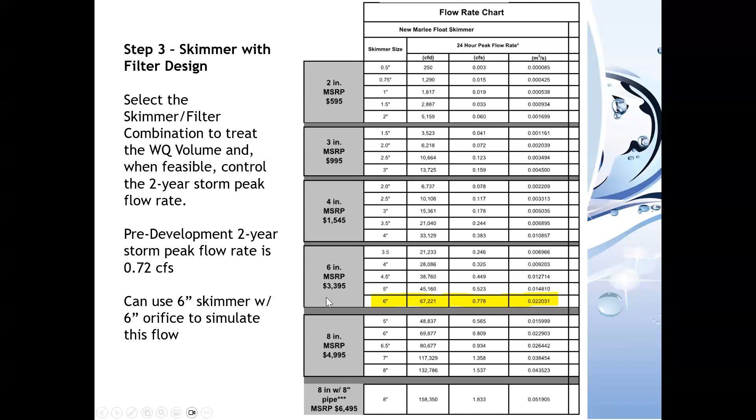Our filters are designed to make sure they keep up with the flow rate of the skimmer. So this filter is never going to compromise the flow rate of the skimmer. We specify for the filter an L1 and L2 for both our inner and outer skirts. If you look at this chart, it'll give you dimensions. What you're going to see on some of the 6-inch and 8-inch, our 8-inch max being our highest flow rate skimmer, that outer skirt gets pretty long. Okay, our biggest one here is 16 feet this direction, 46 feet this direction.

Now, for that skimmer to go in, it's probably going to be a pond serving 10, 15, maybe 20 acres. But it kind of depends on what flow rate you're trying to hit. The reason we do that, as the skimmer rises, it's going to get closer to the outlet structure, right? That pipe's coming up. And so we don't want the dimension from the skimmer to here to be more than about 8 feet, because you really don't want more than a 20-foot stick of pipe in here. Don't want to have to add multiple pipes. So that's why we have it designed that way.

We kind of assumed it's going to be a large pond and we can go out. So if it's 46 feet total, that's 23 feet in each direction. You probably have that in a lot of ponds. Again, our outer skirt is this Mirafi 402 woven geotextile, and the inner skirt is the Absorb-It. One thing to point out, it's actually 2 layers and they're slit.

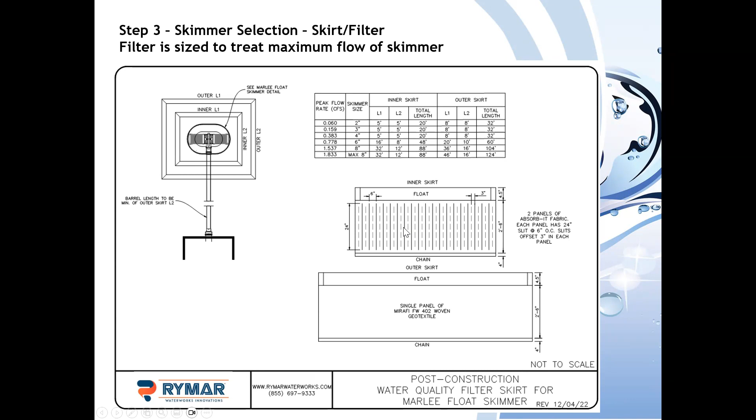And so we get good contact time on this material. Really helps with the hydrocarbon and other pollutants we're trying to take out. Also have a detail for how to put it in a pond. If you may recall, our previous detail showed the skimmer kind of up against the bank. That was kind of for maintenance.

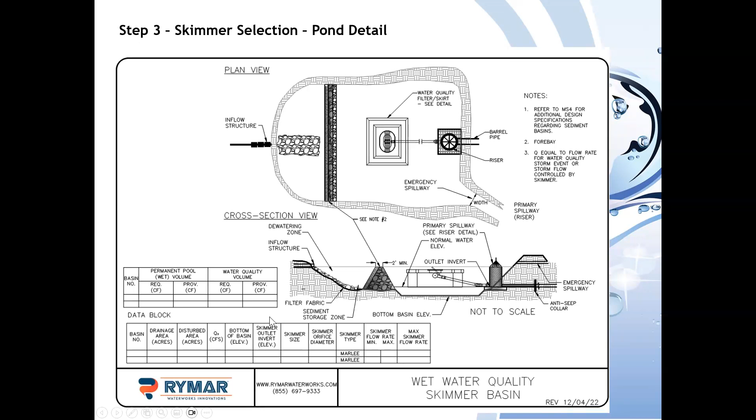For this, you definitely want to make sure you got room, right? You don't want to put it up against the bank and the filter hitting against the side. So you kind of want to get it out in the open part of the pond. Here's all the information you're going to put in for your pond design. So how does this run?

So now we have our same water quality volume. But in this case, we put our skimmer in here. Our 6-inch skimmer is being used for our water quality and our 2-year storm event. And then we have an 8-inch orifice, and it's 4.8 feet above. And so our numbers come out like this. So our water quality peak flow rate is now 0.7 CFS. Remember, it was 0.25 before.

So we've tripled our flow rate for the water quality storm, but it's still below our first quantity event of our 2-year storm. We're only using 7,600 cubic feet. So we've got over 10,000 cubic feet now available to help with our detention on our 2-year and up storms. 2-year storm is 0.78. We were at 0.81 before. We're still assuming we can have a slight 0.06 CFS increase for a 2-year storm.

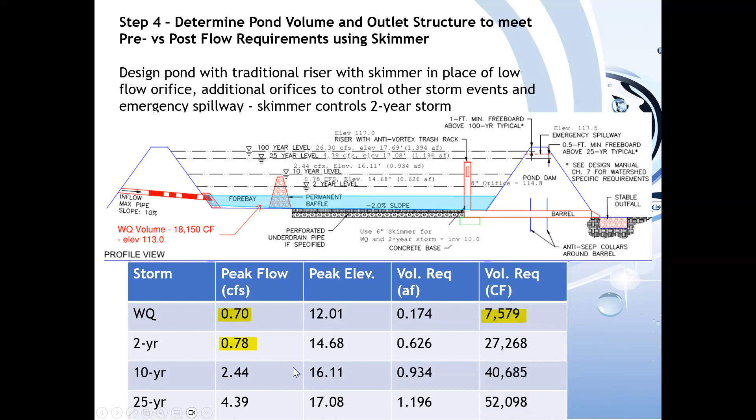And so with that, our storage required is much lower than traditional. So you can see the differences here, really easier to see in percentage. So we've got a 30% reduction in storage required. Now that's based on what was being used in our traditional design. It is much more than that. It's almost 65, 70% less than what's required for our water quality volume, when we do our little spreadsheet calculation. And then 14 to 12% less on the other storm events.

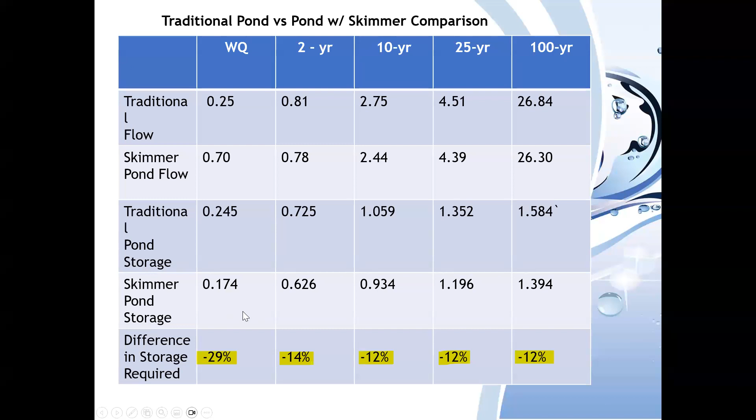So, if any of you have any clients out there that complain when their pond gets smaller, please let me know. Have not found one of those yet.

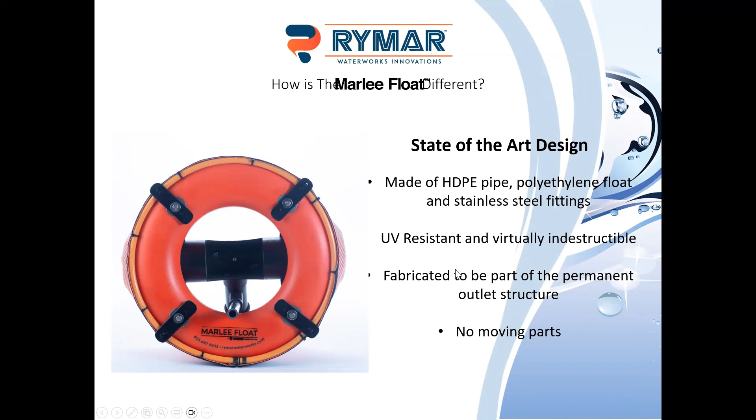So real quickly about our skimmer, it is an HDPE product. So it's HDPE pipe, it's a polyethylene float. All the fittings are either stainless steel or aluminum. It's designed from its initial conception to be part of the permanent outlet structure and just pivots. There's no really moving parts to get stuck or break. We have this debris guard, and so what that does is it keeps any trash, debris, seed and straw on the site, first rain, all the straw comes down, all that outside of there.

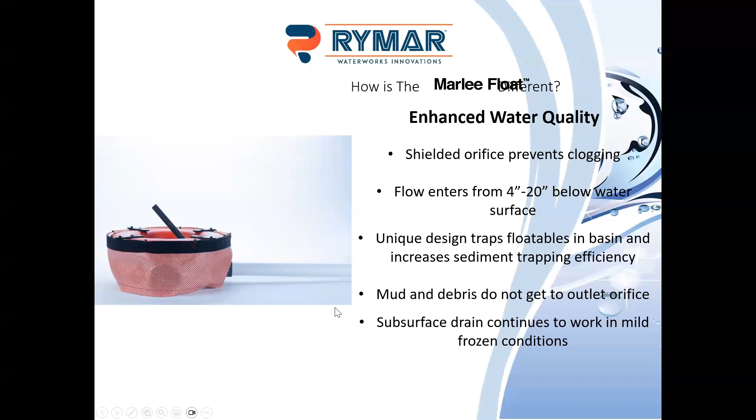We take the flow in from below the surface. So in a mild freeze, say 2, 3, 4 inches of ice, our skimmer is going to continue to work. It's not directly on the surface. Now you get a foot of ice, it's locked up. I'm just going to say it's not going to get much flow through there. It's going to freeze.

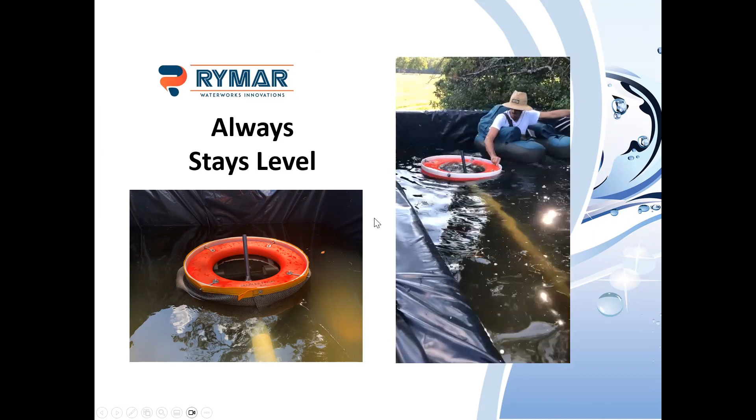Our skimmer, when it first came out, it was a little different design. We did redesign it about 3 years ago. All the weight's at the bottom, so it always stays level. Hopefully no kids are out playing with a skimmer or pushing it down, or a goose or raccoon or beaver using it. But it will always come back and stay level.

We have custom floats now. Actually, our 6, 8, and our 3 and 4 all have custom floats. Our 6 and 8 have handles in them. These things weigh about 200 pounds, so it makes it easier to carry. Haven't had it requested yet, but we can do custom colors if you really want that.

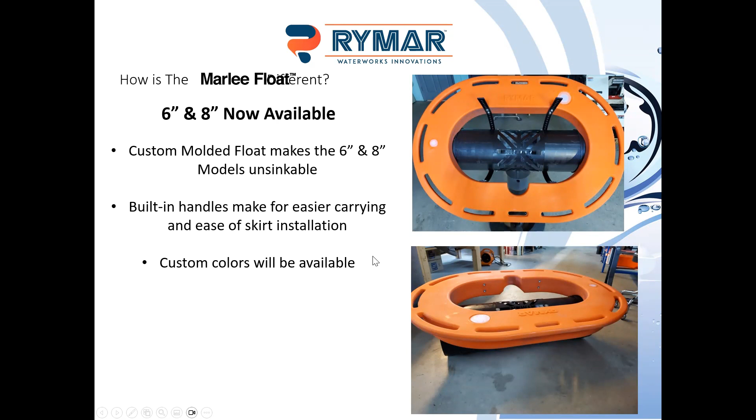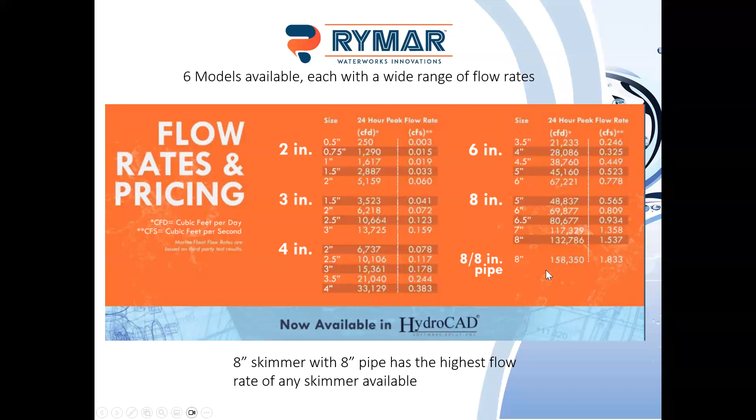And then we have 6 different sizes. So we have our 2-inch through our standard 8-inch. Our standard 8-inch uses a 6-inch pipe. And then we have what we call our 8-inch with 8-inch pipe. We often refer to that as 8-inch max. That has a flow rate of 1.8 CFS. Most other 8-inch skimmers flow about 0.9 to 1 CFS. So if you do have a huge site that needs multiple skimmers, our 8-inch max may be a good solution for you. So that's it.